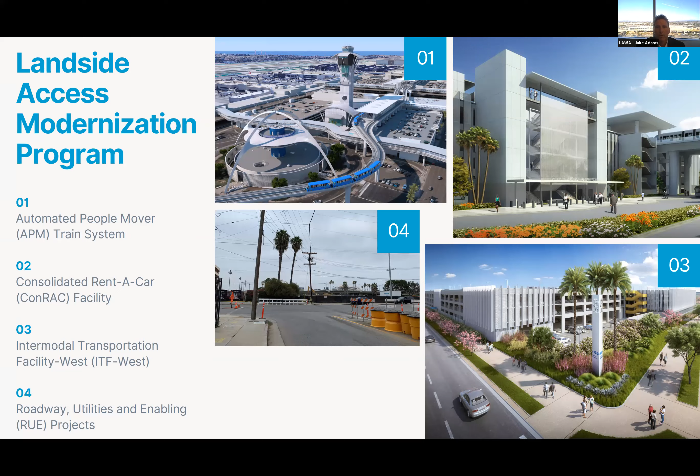Next slide. Certainly one of the most challenging things about the LAMP program is that it literally spans from the front door of Tom Bradley all the way out to the 405 freeway. Right now, as we speak, with the exception of 2 areas, we have construction going in that entire 2.25 mile run. The only 2 places we don't have construction right now are the APM crossing over Sepulveda and the APM crossing over Century Boulevard.

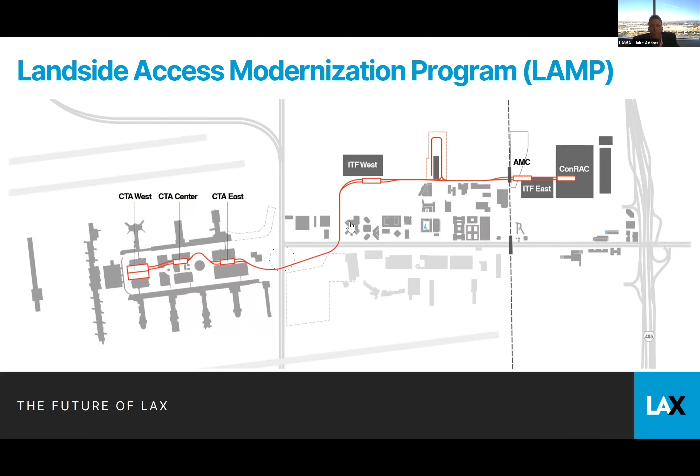Next slide. So Stephanie, let's go ahead. This is actually a time-lapse video that Stephanie and the team have put together, and we'll get this going here. This actually started back in May, so it gives you a pretty good timeline of the past 8 months. It's really been amazing how much construction has occurred over the past 8 months.

This is one particular location looking at the APM guideway crossing 96th and 98th Street before it turns east towards Airport Boulevard. Not only guideway construction, it's showing the early stages of the station. Also in the background there, you can see all 4 levels of the ITF West structure coming up. Really the amazing thing to me has been how fast, in the past 8 months, how much work has been accomplished, especially in light of the fact that we've been in this global pandemic.

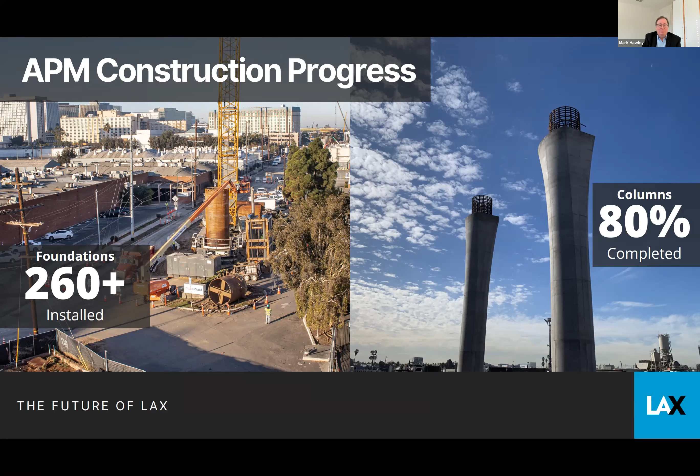Progress at the West CTA opposite TBIT. You can see the guideway segments there, the box girder sections coming into the CTA West station on the left. CTA Center now is above the parking structure, and you can see it taking shape. And then a very iconic picture of CTA East Station looking westward towards the theme building and the air traffic control tower, again up at the station level. It's great to see so much progress now all the way along the length of the 2.25 mile guideway.

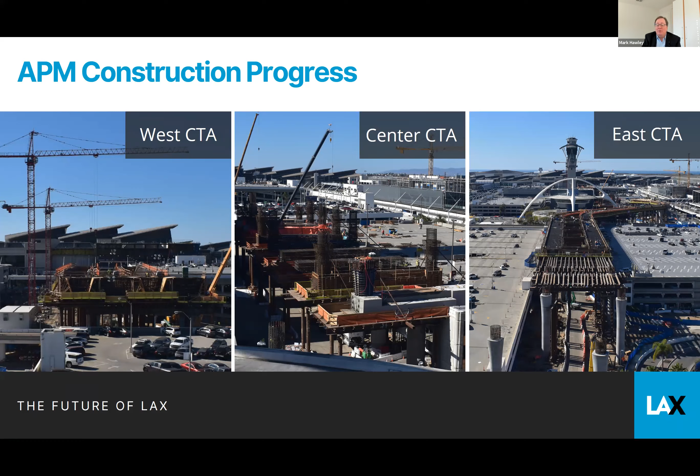As we said, for the guideway structures, as Jake showed in the video earlier, the last segments to go across Century Boulevard here with the false work coming soon, and segmental construction will go across Sepulveda. ITF East Station on your right, crossing the Metro Southwest Yards, and the ITF East Station being constructed. Further over to the right in the distance is the ConRAC building, where the ConRAC station will ultimately connect to the ConRAC facility.

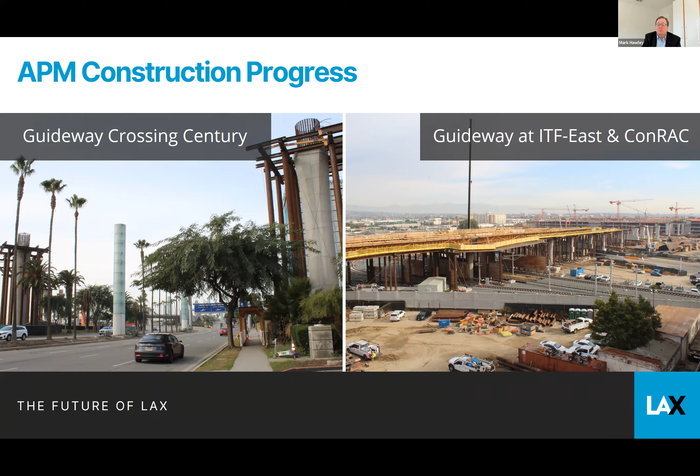So with that, I'll hand it over to Fadi.

Thanks, Mark. Good morning. So yeah, the ConRAC, as you guys know, and as Jake mentioned, you probably know much more than anybody here, it's at the end of the APM line, or the beginning as you head towards LAX. So this is right off the 405 freeway.

So go back to the rendering, please, just one second. I wanted to position this for some of us. Thanks, Stephanie. So you see a rendering here of the west face of the facility as the train is entering the station on the 5th level. So you enter that roof level, basically, and then there's direct access to the customer service buildings there.

As you may know, it's basically consolidating the 3 major companies with their 10 or so brands, as well as 3 independent operators. And then below, you could see that Bus Plaza along Concourse Way provides a connection to the facility for other non-concessionaires. The rendering isn't showing it here really well, but definitely one of the key things is the APM station being seamlessly integrated inside the ConRAC facility. A lot of coordination has been ongoing and still ongoing to achieve such a complex interface.

As you know, the systems have to be integrated yet separated, and also there's high sensitivity for track settlement tolerances, et cetera. So quite a lot of engineering and construction coordination needs to go on.

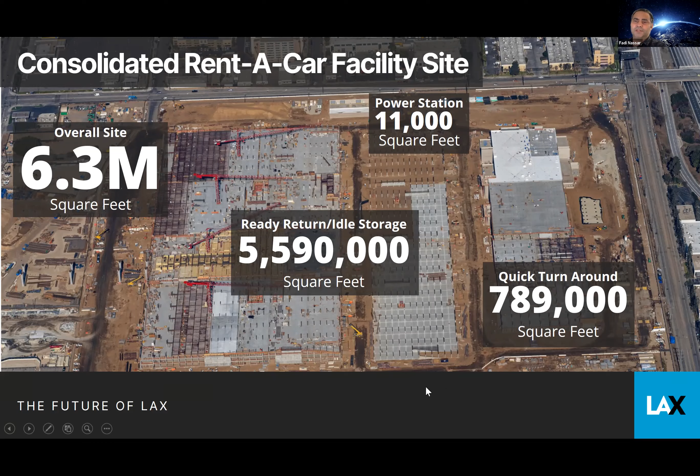Take a look at the next slide to see a little bit more of the vertical progress of construction and where we're at. Again, we're looking north here, and you have over 100 acres, massive, with a significant roadway and infrastructure backbone for it.

Notice we have about 6 cranes up, and I believe a 7th is coming up this week, as I understand it. But we're deep in concrete placement. Just to give you some stats, we've placed to date about 70% of the building concrete, that's about 186,000 cubic yards out of a total of 265K.

To position you again, the 405 is to the right of that picture. The QTA building is almost 90% complete concrete-wise. You could see in the back, and probably better in the aerial, that the roofing is ongoing as we are fast tracking the construction here.

In the middle at the idle storage area, picking up from the first level, and on the left we're building up the last 5th floor of the ready return building. Overall, we're at over 70% complete, like I mentioned.

I don't know if you can see on the far left, but the guideway supports that Mark talked about, those are entering the building. Thank you, Stephanie, for pointing them out. We can get to the next slide, please.

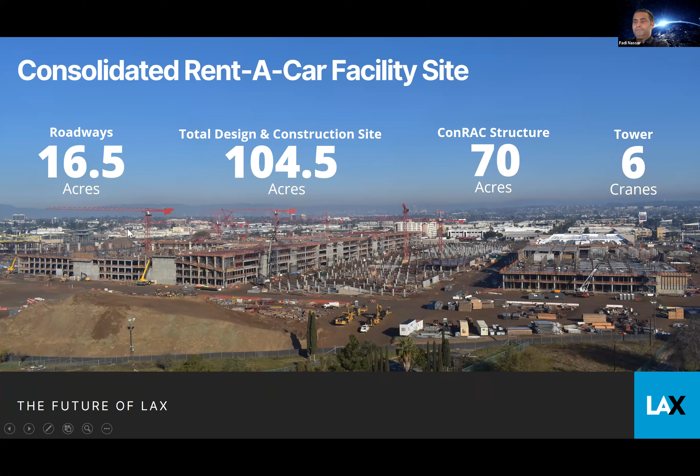So here we're looking again east towards the 405. You've got that ready return building with a station terminating on the plaza on the roof with a customer service building. Behind it was that idle storage, then QTA building, and then behind it is the 405 to orient yourself. And then you could see Concourse Way below.

Obviously, the whole focus of that building, as you guys may know, is removing 3,200 rental car shuttle trips from the CTA, and replacing them with that one people mover station. So it's quite a good improvement to passenger experience in our belief.

And to support that whole operation, obviously, we need a robust QTA facility, which I'll talk about a little bit on the next slide, please.

That view of the QTA, basically it's a large building in its own right, with a significant amount of technical support in it, fuel nozzles, car wash bay, maintenance bays. I would say not to forget the flexibility of the building and the fact that as we get more electrified, the infrastructure is ready to support the EV charging as demand is scaling up.

Thanks. On to you, Andy.

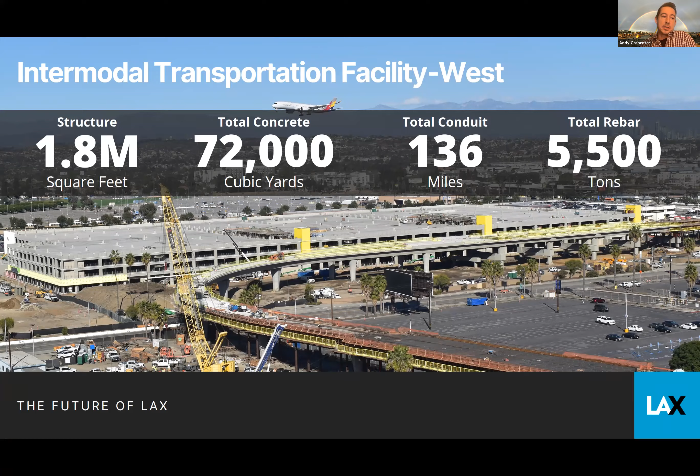In our next slide, we focus primarily on the public amenities, and this is just a very small snapshot of what we have here. It will aid in the overall passenger experience.

From our vertical circulation, we have these 3 elevator cores painted in yellow, and 2 escalator banks that provide an intuitive color palette, just to provide wayfinding and layout, so it's easier for the public to travel and traverse this massive structure.

The design team focused on features that would enhance the aesthetic appeal while prioritizing functionality paired with that elegance. So it's not simply a parking garage where you just go and park. There's an intuitive feel, and the architectural language speaks of the directionality of where you need to head as you're entering over to the APM. That's your ultimate destination as you get to the CTA.

As I mentioned earlier, those light wells are a necessary seismic separation, but instead of just adding a light well, the design team incorporated these escalator banks, which cascade all the way down from the 4th floor to the 1st floor. And that provides, again, that vertical circulation.

And instead of covering the escalators with some sort of opaque roof, the team designed a steel structure, as you see those columns right there, but it has a clear canopy to take advantage of the warm weather we have here in California and the fantastic climate.

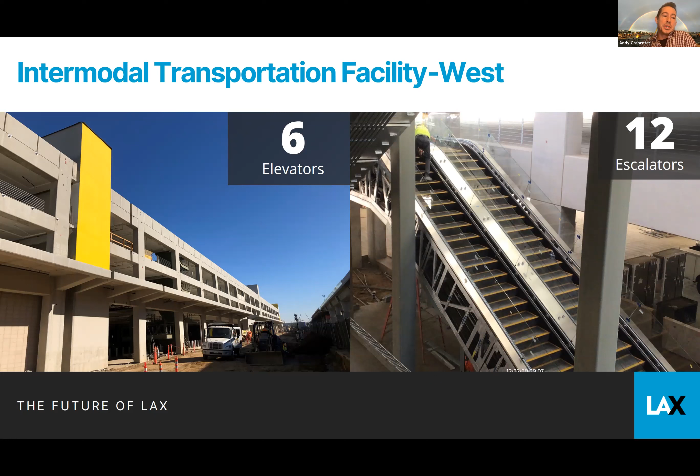What distinguishes this parking garage from any other remote garage is the linkage with the actual APM station. So scheduled to arrive in just a few short months, we're going to have 2 pedestrian walkways that will link the ITF West facility to the CTA. That's when they're scheduled to arrive, and we'll make that tie-in from a construction standpoint.

Stretching overhead from those 2 guideway bridges, we're actually going to have a plaza that will link on at grade. So there'll be these 2 modes of transportation between the 2 facilities.

As far as the facade treatment, this is just another example where we showcase integrating LAWA and the LAMP elements as one cohesive unit, so that when you arrive at the ITF West facility, you are arriving at LAX. Rather than this being a standalone facility, this showcases our gorgeous facade treatment with vertical fins and interior perforated panels at key locations around the perimeter.

As the famous theme building is at the center of the airfield, our vision is that the ITF West will be, with the other LAMP facilities, synonymous with efficient travel and a welcoming and familiar feel.

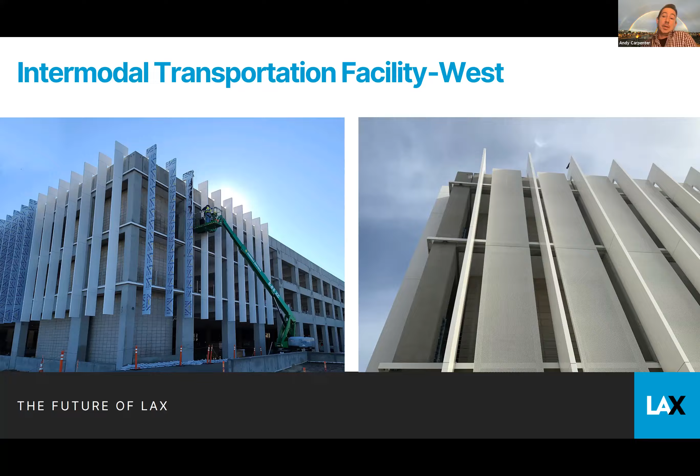We're so excited to see this again become a reality. This was a vision that many had.

On our last slide, I just want to highlight a little bit of our schedule, not simply the end date, but where we came from in these few short years. Just to go back in time, in September of 2018, we finalized our contract with Swinnerton Builders and began the rapid design build process. But by July of 2019, we celebrated groundbreaking in that Lot C, as it used to be, as many of you all know, and started work in preparation of what would be just a whirlwind of construction in the subsequent 18 months until now.

By November of 2019, the team victoriously celebrated their first concrete slab on grade pour, and that would again mark the first of 96 slab or deck pours.

By October of 2020, the team championed the last deck pour and topped out a celebration just 11 months after a huge stalwart performance.

But I would be remiss if I wouldn't point out this schedule would not have been possible without the tireless work effort of our design build team in Swinnerton and their design partners, as well as with our third party. That was one of the unique features that this program had as a way to incorporate our design team with all the AHJs, with the authorities having jurisdiction, that the DBSs of the world, the BOEs, those that actually made this possible with all the permitting and plan check approvals. It was a very tireless effort, and I would say a very, very successful one as we partnered with our city agencies.

Now, as we've rounded the corner to 2021, we look forward to becoming again that beautiful front door of your favorite airport. As you begin your honeymoon or launch your new business endeavor to a faraway city, our hope is that ITF West becomes your go-to as you start or end your journey.

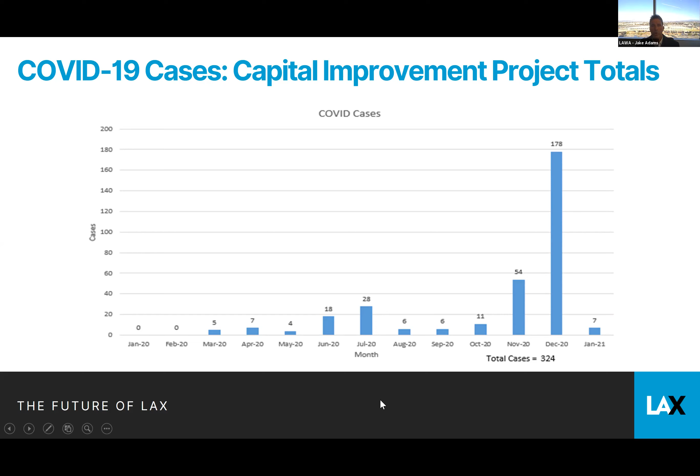This here is just a snapshot. We track all of the COVID cases reported to us on our capital improvement projects. I would discount January because that's only one day. We were doing pretty well, but kind of like the rest of the local environment, November and December we had an alarming trend of increase in COVID cases, and unfortunately that's continuing through January.

So there have been quite a few challenges, as I'm sure you can imagine. Working remotely has certainly been one of them. Thanks to Tony Kirby, he complimented me in the one-on-one sessions earlier that he thought LAWA did a really good job transitioning to the remote work environment. But I'm sure if he listened to Mark and Fadi and Andy, it was not a quick process and it was rather painful. As an operating airport, we really had very little need for telecommuting. We had no formal telecommuting policy, so it took a little while to get up and running, but I do have to commend our IT department. They worked constant, nonstop hours to get our entire organization up and running, and since that point it's been incredibly effective. I certainly see that continuing into the near future.

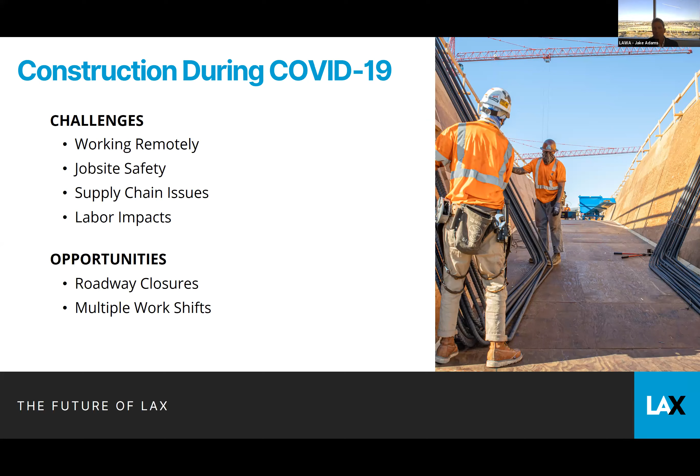Next slide. One of the other big questions we get besides COVID is how are we doing with our public-private partnerships at LAX? As most of you know, the LAMP program, our CONRAC and automated people mover projects are both public-private partnerships. ITF East is a traditional design build contract, and our ITF West is a progressive design build contract.

But really the successes that we've had with PPP at this point, I'd say first and foremost is the fact that we were able to do it as a performance-based procurement. That really led us to a lot of successes, especially in alternative technical concepts, because that allows the private industry to come up with innovative ideas and options that, frankly, we as LAWA did not consider when we were putting these plans together. So two examples of that have been on the CONRAC.

It's a large building, a large site, trying to do a lot of things. Our developer came up with a concept that reduced the overall footprint of that facility. They went one floor higher, but freed up a whole lot of land that was able to be turned back to LAWA for future development. On the APM project, the developer came up with a creative way to do a cantilevered station along Centerway, which allowed us to not have to demolish parking structures P2B and P2A. As you can imagine, back in 2018, 2019, the loss of those two parking structures would have been an unbelievable impact on the parking situation at LAX. So definitely some successes there.